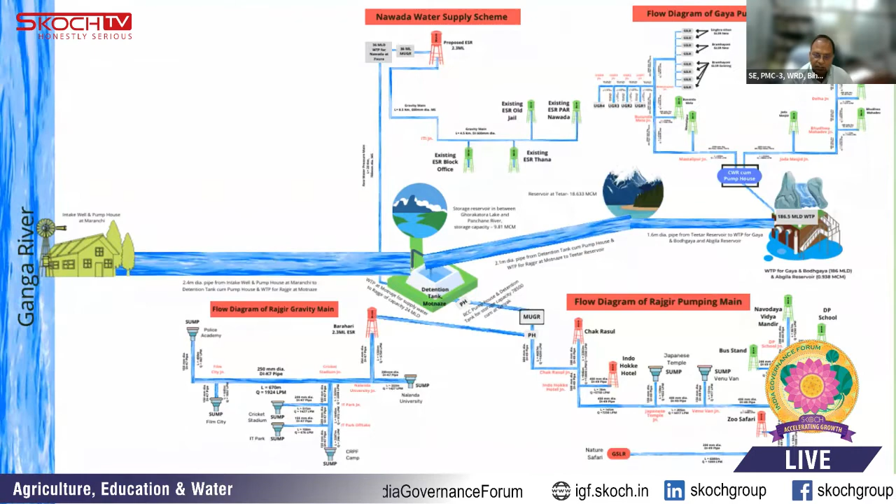This covers 151 kilometers from Hathidah to Gaya town. In this project, we are feeding drinking water to 3 water-scarce towns of Bihar: Rajgir, Nawada and Gaya.

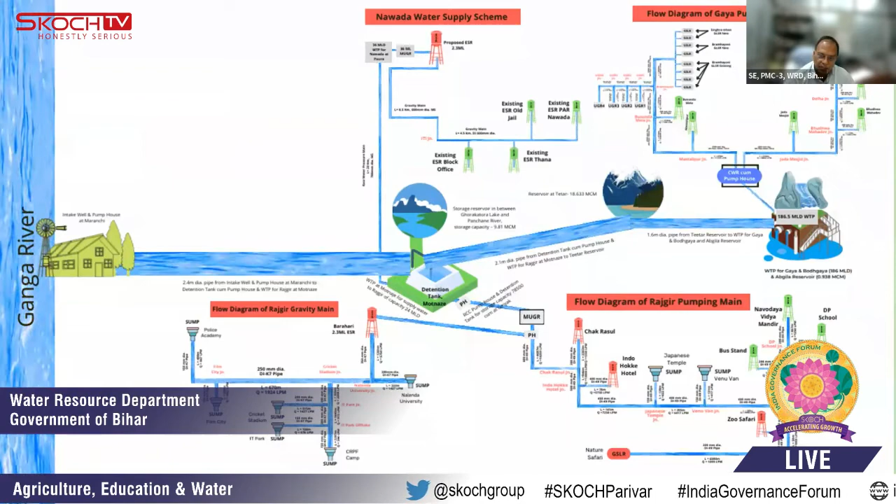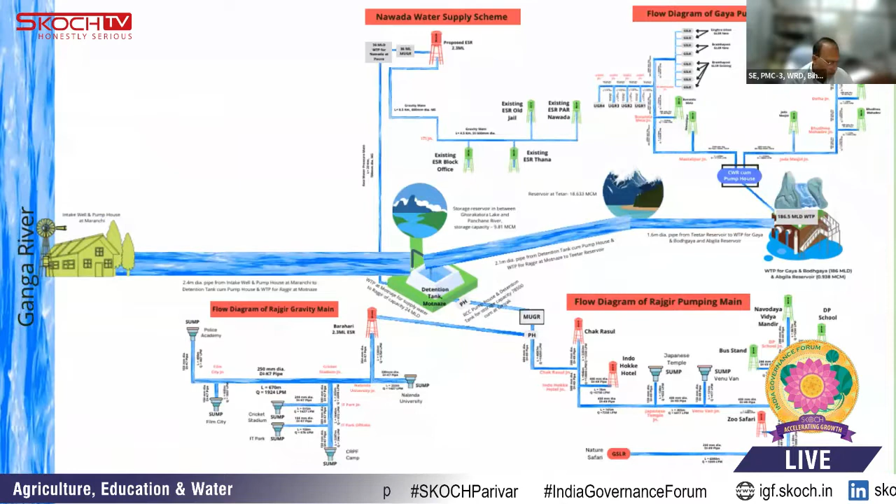In this project, we are lifting flood water during the monsoon season, for 4 months from July to October, lifting water around 80 meters from the Ganga up to Gaya. We are creating 2 huge reservoirs, one at Gaya and another at Rajgir, to store raw water for the remaining 8 months, and we will supply drinking water after purification throughout the whole year to around 9 lakh people in Rajgir, Gaya and Nawada.

As mentioned, this project has been considered in light of our Chief Minister's flagship program, Jal Jeevan Hariyali Mission. It was formulated because the groundwater table is lowering day by day in this area, causing a scarcity of drinking water.

In this project, we are utilizing flood water which was previously unutilized during monsoon and flowing into the Bay of Bengal. We extract this water during the monsoon period, store it in reservoirs for 8 months, and then supply it after purification.

Water demand has been calculated up to 2051, and in a stage-wise manner we will increase our supply according to the demand. Currently we are constructing this project for demand up to 2021, and gradually we will increase our capacity according to the demand.

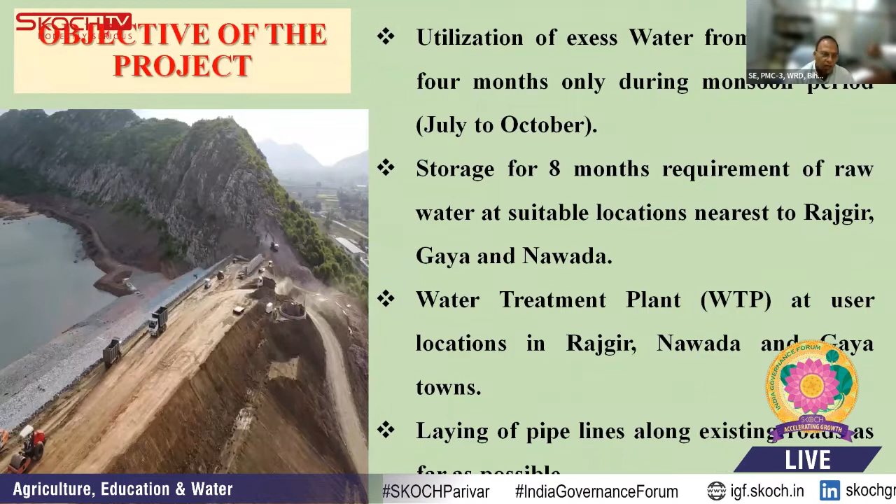The objective of this project is utilization of excess water from the Ganga for 4 months during the monsoon period, July to October, storing that water for 8 months in 3 reservoirs at Rajgir, Gaya and Nawada, and supplying it by treating raw water in water treatment plants. 3 water treatment plants have been constructed at Rajgir, Nawada and Gaya towns, and pipelines have been laid along existing roads.

Benefits of this project include employment creation for people in this area, and socio-economic benefit with enormous convenience of drinking water to urban and rural people and animals. Storage of water in the forest region of Rajgir Reservoir in Nalanda and Tetar Reservoir in Gaya will facilitate groundwater recharge, ultimately benefiting flora, fauna and the ecosystem.

As such, the project is techno-economically viable. Agriculture produce will increase due to improvement in groundwater level. Also, the wildlife sanctuary at Rajgir will be provided water from the proposed reservoir for various animals in the area and also water bodies inside the sanctuary.

Religious places such as Brahmkund, Saptadhara, etc. in Rajgir, which are hot springs, have become devoid of water as a fallout of alarming groundwater depletion. Declining rainfall, inadequate recharge of groundwater, and overutilization due to increased population appear to be the main reasons for the decline in discharge at the Rajgir hot spring.

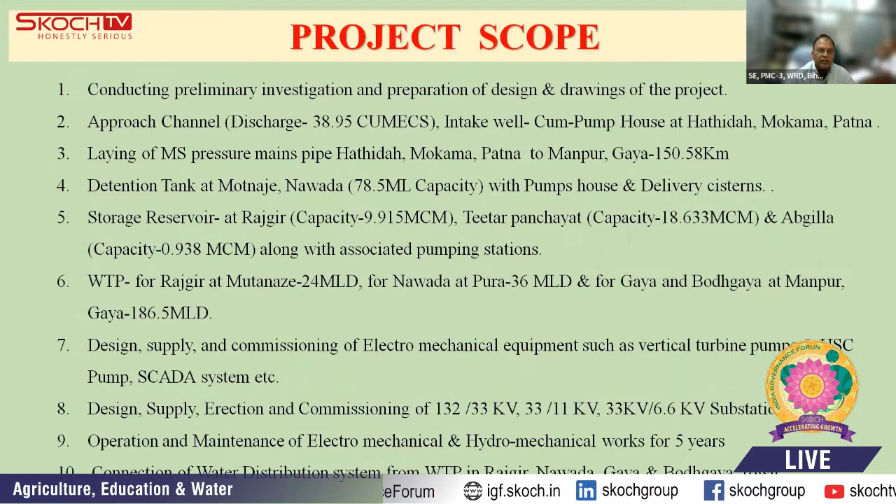These are a few pictures of the intake well at Hathidah Mokama, where we are extracting flood water from the Ganga.

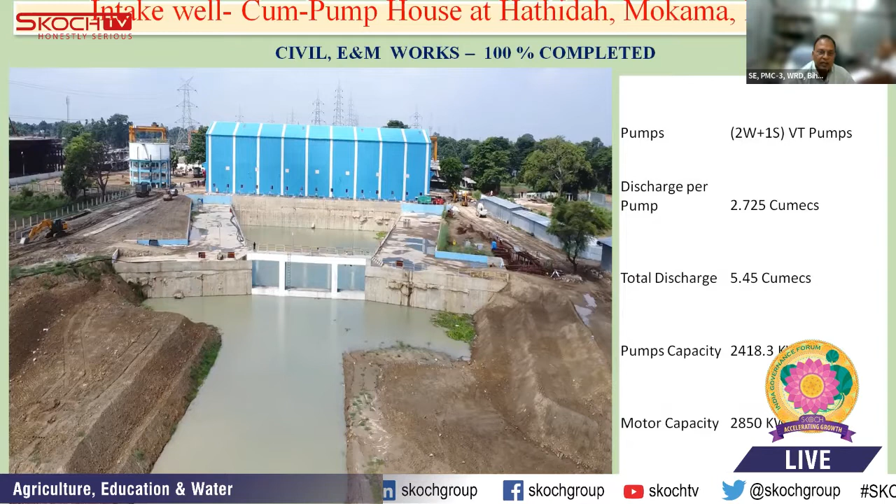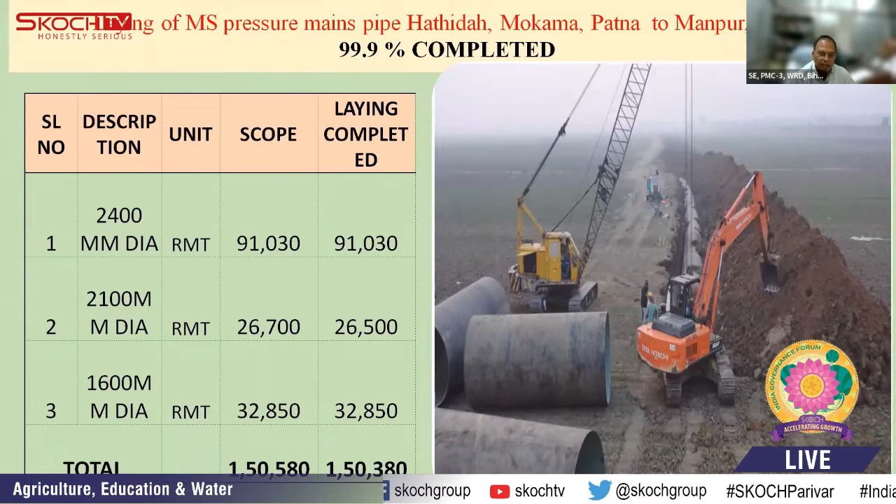These are pictures of the MS pipe being laid from Hathidah to Manpur, and this is the detention tank at Motnaje, Nawada.

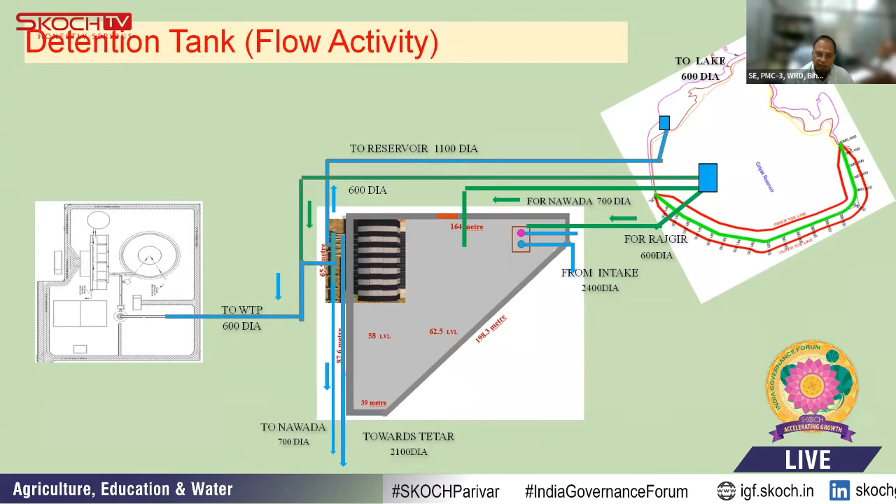Next, this is the highest level Tetar reservoir, which is situated in this pipeline at the highest altitude.

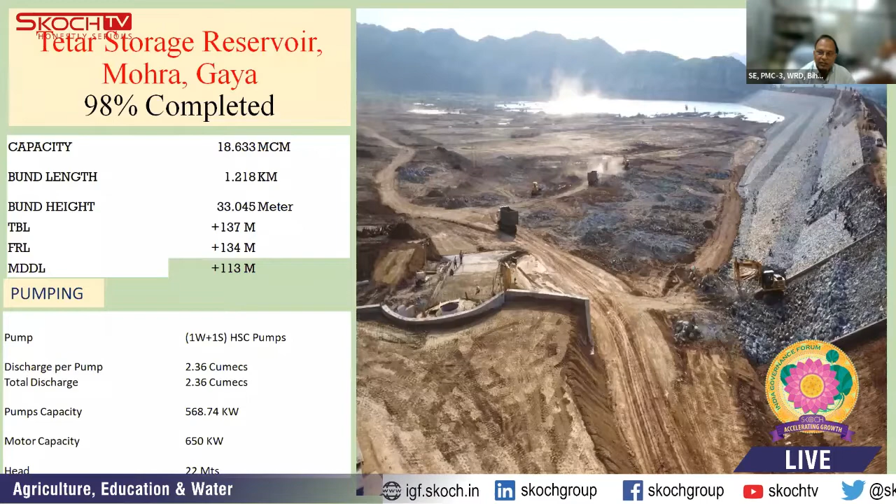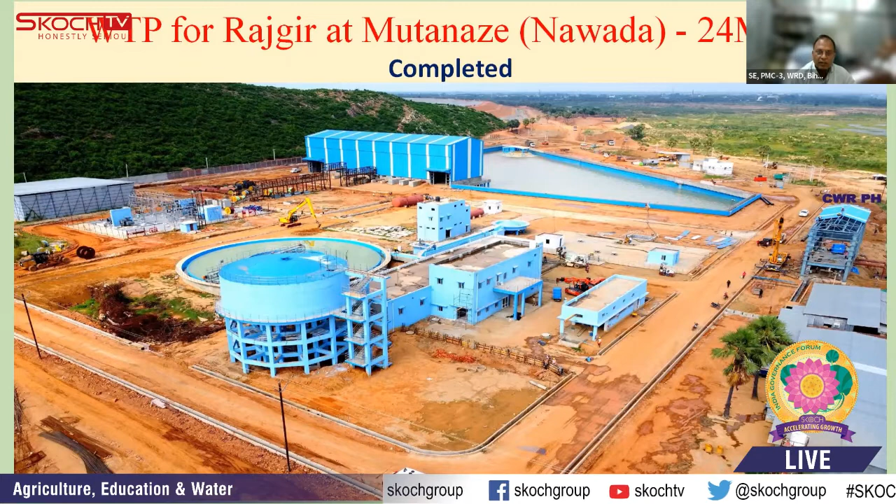Okay, next, this is the Tetar reservoir. Next, this is a water treatment plant at Nawada. Next, this is a water treatment plant at Gaya. And this is the Rajgir water supply schematic.

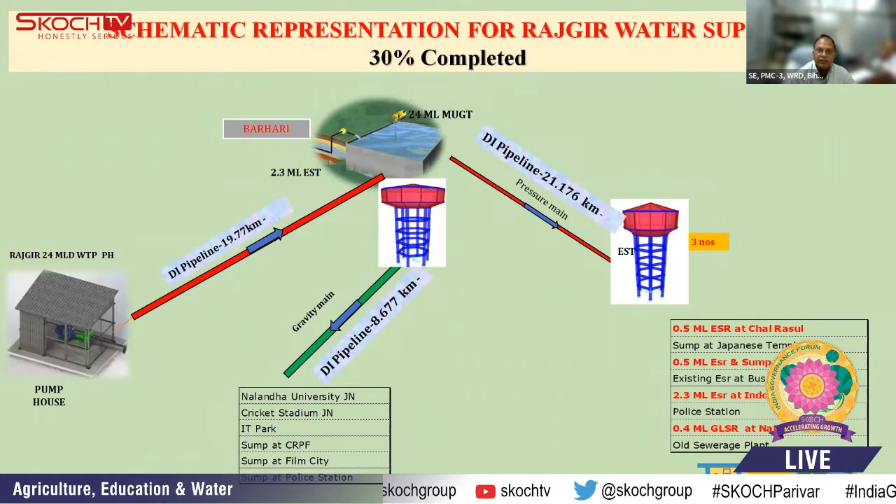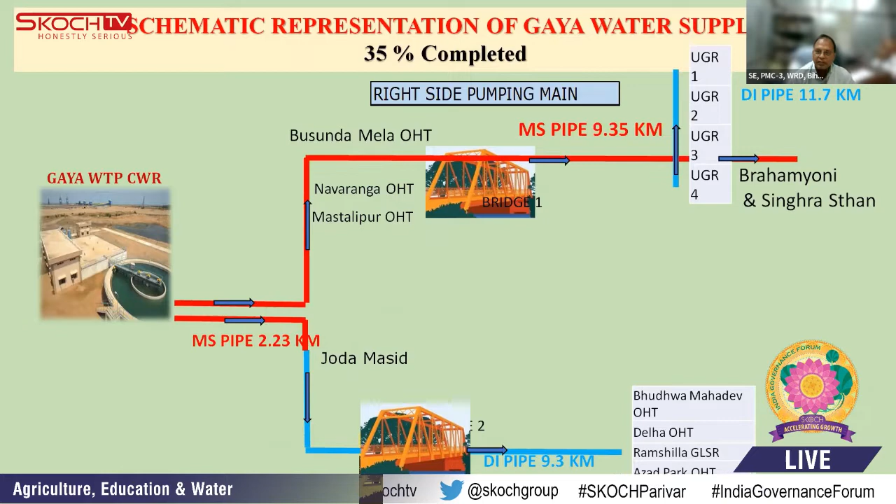Next, these are a few pictures of different components. Next, this is the Gaya water supply line diagram. Next, this is the Gaya WTP progress of work. Next, this is the Nawada town water supply.

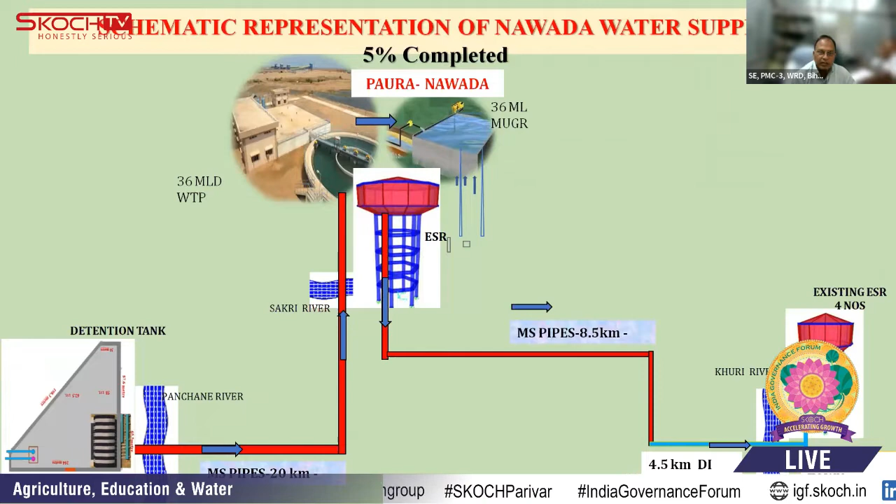Supply of Ganga Jal from the intake well to the detention tank is operable. Storage of Ganga Jal water in Rajgir reservoir is under progress. Operation of the Rajgir water treatment plant is also ready, and distribution of purified water to Rajgir town is under trial run.

Thank you. Jury members, Alok sir, very good sir, project. But normally in such a large project, there is always a time and cost overrun.

So, when was this project originally scheduled to complete, and what is the full completion date now expected? Sir, this project started 2 years back during the Corona period, but overcoming the challenges of Corona, the completion period is March 2023. However, we are ahead of the completion period and are likely to complete it by December, though our official project completion period is 2023.

Okay, so there is no time and cost overrun. No, sir. Okay, very good sir, excellent work. In fact, this will augment the water supply in your area.

But can you also think about connecting or supplying water to other areas besides these three major cities? Yes, sir, we had earlier formulated plans for a few more towns, but due to some constraints, since this type of project is being constructed in Bihar for the first time, we have limited it to these three towns only.

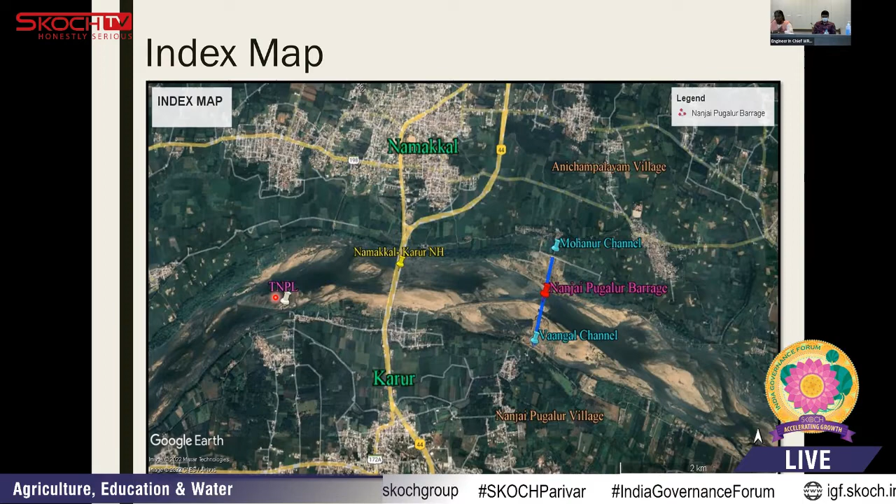And the fourth one is Tamil Nadu Newsprint and Papers Limited, one of India's leading paper mill companies, used to draw 14 to 16 mgd of surface water from Kaveri. During the severe drought in 2014, there was no water in the river, and there was acute shortage, and around 46,000 metric tons of paper and 22,500 metric tons of paper board was not able to be produced, and there was a huge revenue loss of 160 crores to the company.

This forms the necessity of constructing a barrage across river Kaveri in this location.

The benefits of the project. To overcome all these problems, the benefit of the Mohanur Canal is, at present, the Mohanur Canal is offtaking directly on the left side of Namakkal district, and the Mohanur head sluice is being constructed right at the junction point of the left bank where the barrage is located, so that the farmers can get the assured supply of water throughout, and the acreage benefited is 2,583 acres of Ayakat. In the same manner, Vaangal channel in Karur district will definitely be irrigated with an assured supply, and 1,458 acres in Karur district will be benefited out of this project.

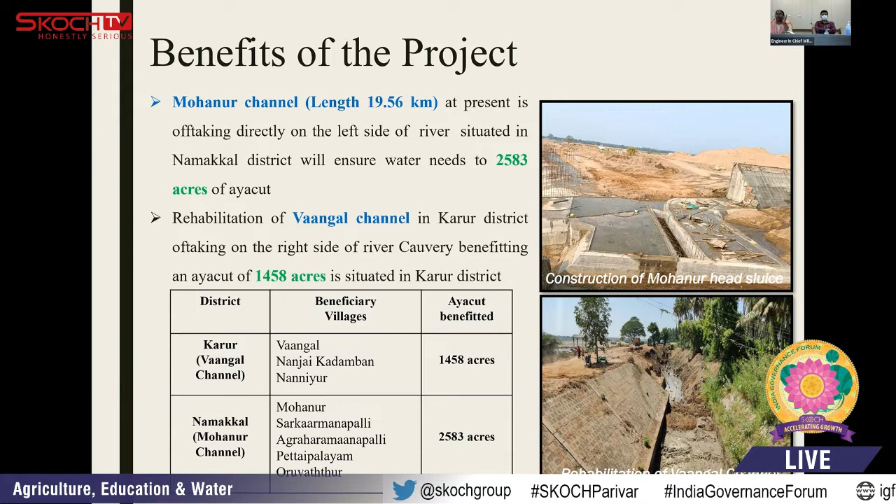And drinking water scheme pumping wells, which are located in the upstream of the barrage, where 0.8 TMC of water is stored, there are 6 pumping well schemes in Karur district and 9 in the Namakkal district that will be benefited out of this, and the total population which will be benefited with this project is 34,993 in Karur district, and in Namakkal district, 71,612 persons will be benefited.

Benefits for the industrial purposes. As said earlier, the backwater profile length of constructing a barrage to a height of 5 meters will be around 8 kilometers. The TNPL, that is Tamil Nadu Newsprint and Papers Limited, which is located about 3.5 kilometers in the upstream of the barrage, will get complete assured supply so that their water supply will not be devoid, and in the event of drought and even in the lean water season, there will be a minimum head of 3 meters, which will result in no revenue losses being incurred by that company.

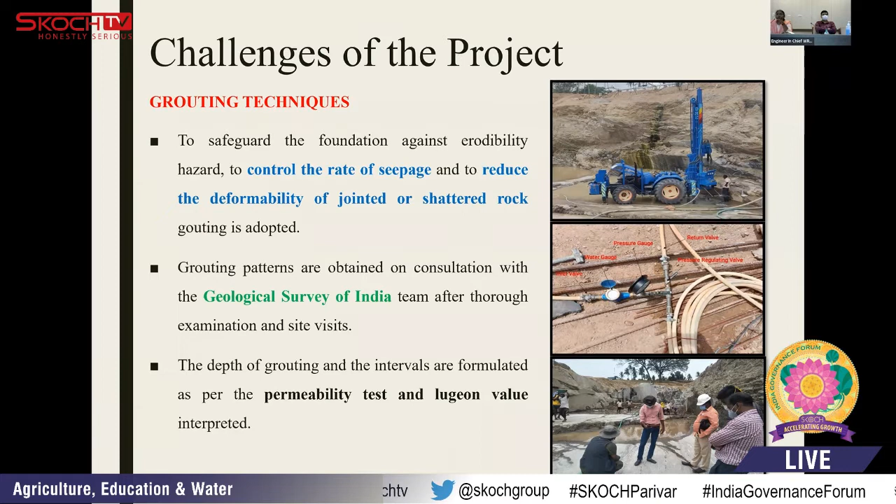Another challenge is the U-drain arrangement. In order to release the uplift pressure expected to be exerted at the base of the stilling basin, a drainage arrangement with required pipes below and above the foundation is provided. A water collecting system consisting of half round cc pipes and porous concrete is being filled in that, and at the upstream we have a non-return valve so that the water pressure gets released in the non-return valve area.

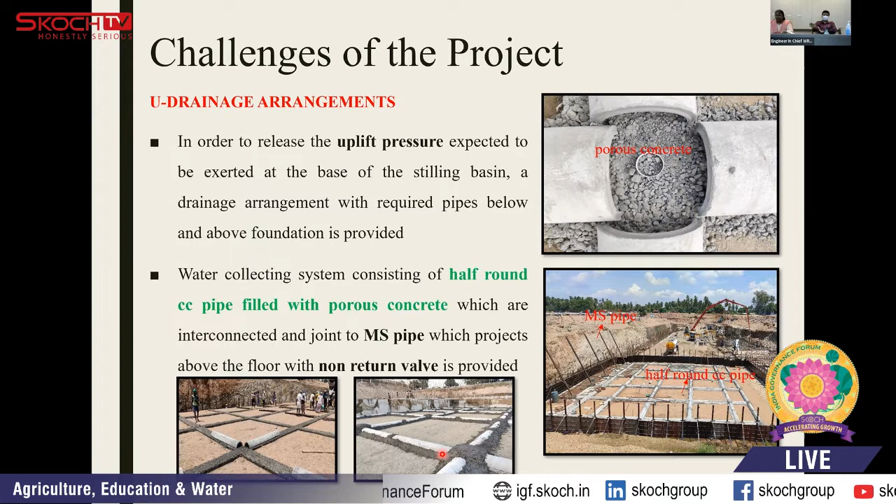The challenges of the project. Cauvery is a continuous flowing river all 365 days, even with a lean flow of at least 2,000 cusecs for drinking water purposes. In this river bed, an open foundation of around 42 meters floor length for a length of 1,056 meters makes a big issue because of the challenge of dewatering problems.

The dewatering problem is sorted out by various means such as the open dewatering method we follow. Then, if there is a sandy layer, it is better that we use the temporary well point dewatering method. In some places, there are various layers: the first layer will be sand, the other layer will be soft disintegrated rock, and the next layer would be the hard rock area. In certain cases, after encountering a sandy layer, we may sometimes get a layer of pebbles also. During that time, when the well point method or vacuum dewatering pressure method could not be done, we go in for multi-stage dewatering, and this is a huge process for an open foundation earthwork. This is the challenge faced in the project.

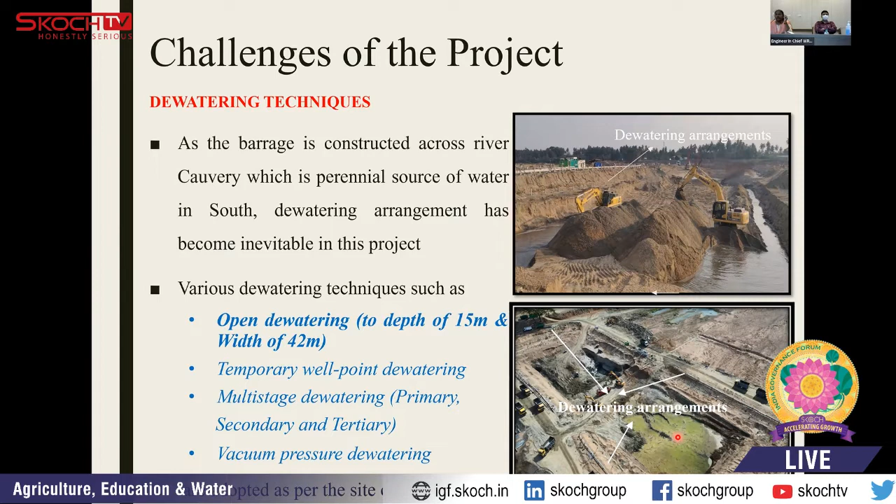Coming to the uniqueness of the project, since this project is located in a flat terrain, the slope of the river bed is 1 in 1,700.

Considering the aspects of the location of the barrage, the only available thing we can construct in this riverbed is a barrage to store the water and make it irrigable to other areas. This is one of the uniqueness of the barrage, and the lesson learned is that in flat terrains, only a barrage structure could be constructed, and water can be stored and utilized for multi-level purposes.

Another uniqueness of the project is the SCADA arrangement. After the regulating structure of Mettur, this is going to be the first structure with supervisory control and data acquisition, which is yet to be adopted. This stays much ahead of the conventional method of delivering water. By monitoring the water flow, the shortages and uncertainties of water to tail end users shall be monitored effectively.

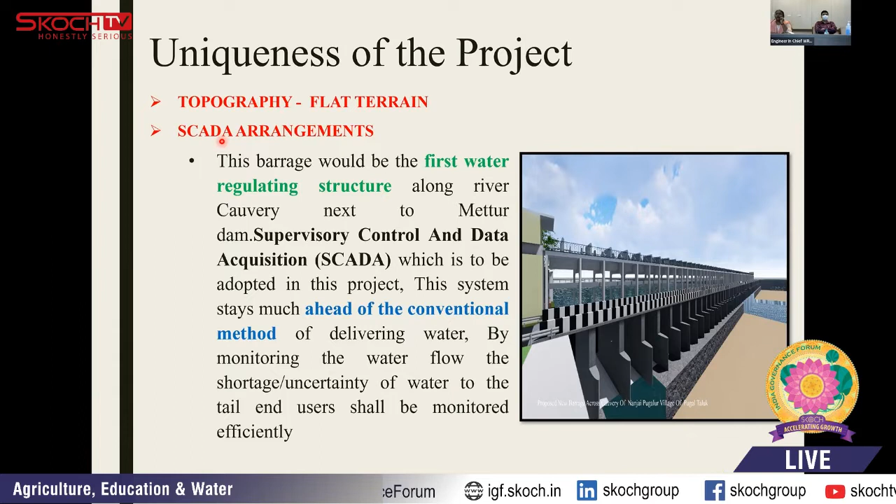Encompassing all of these things, agriculture is benefited around 4,041 acres of land getting irrigable, and the over-exploitation zone in the groundwater is recharged. For drinking water purposes, 1,06,605 people are getting benefited from Karur and Namakkal districts, and as industrial usage, 160 crores per year worth of water will be given to the Tamil Nadu Newsprint and Papers Limited.

That's all, thank you very much. This is the importance of my barrage work, and it comprises a wholesome work. As we have studied in our earlier days, water is used for agriculture, domestic, industrial, and drinking. My project encompasses all of these things, and that is the uniqueness of the project.

Constructing a barrage across the river Cauvery in a flat terrain is the lesson learned from this barrage. Thank you, one and all. Thank you, jury members.

Thank you, ma'am. This is a very multi-purpose project. You have given so much benefit to the entire region. Excellent work, thank you very much. Thank you very much, sir. Thanks, ma'am, good project, no specific question to ask.

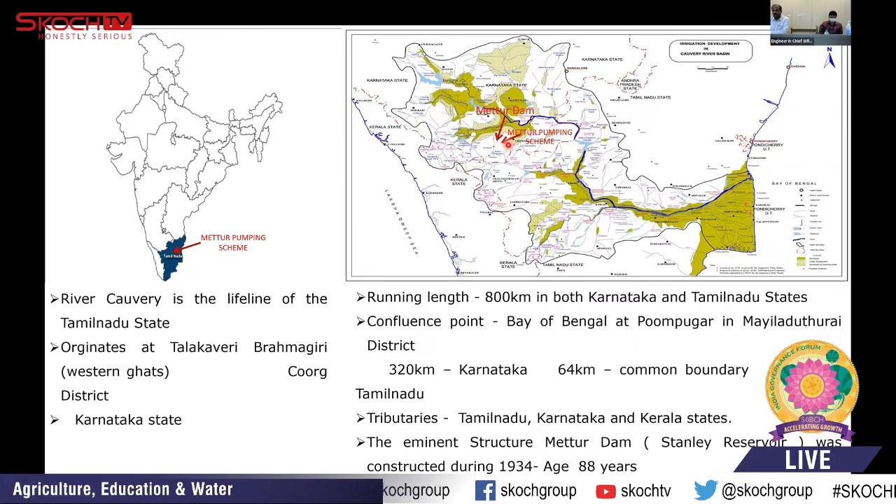The Mettur reservoir is constructed across the river Cauvery in Salem district of Tamil Nadu. To fulfill the need of agriculture and to divert the excess floodwater from the Mettur reservoir, the scheme is proposed to construct a main pumping station on the left flank of the reservoir, located in the Thippampatti village of Mettur Taluk. Need and necessity of the scheme.

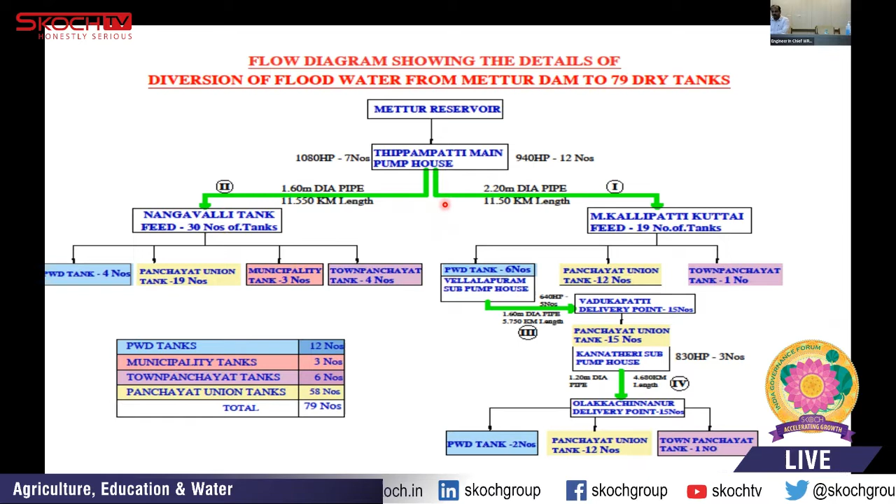In this scheme, 3 pumping stations have been constructed for lifting water at various levels. The main pumping station is constructed at Thippampatti village of Mettur to lift water to a height of 139 meters, and sub-pumping stations are constructed at Vellalapuram and Kannatheri, at about 60 and 40 meter heights respectively.

The land acquisition work has been completed for about 74.58 hectares out of 109 hectares, where land acquisition is in progress.

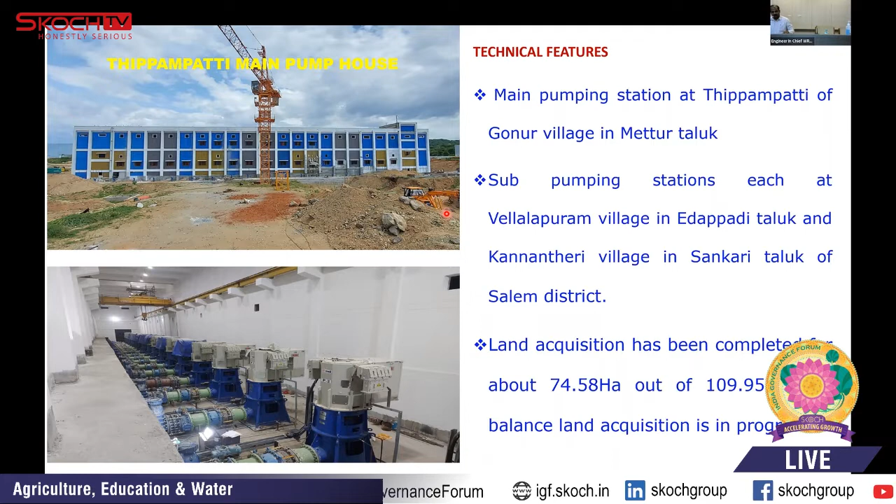By implementing the scheme, the Sarabanga Basin would be sustainable, improving the welfare of the farmers. We are achieving the project credits by way of improving irrigation facilities, increasing food production, creating more employment opportunities, and thereby improving the socio-economic status of the people. Groundwater recharge can achieve 4 taluks.

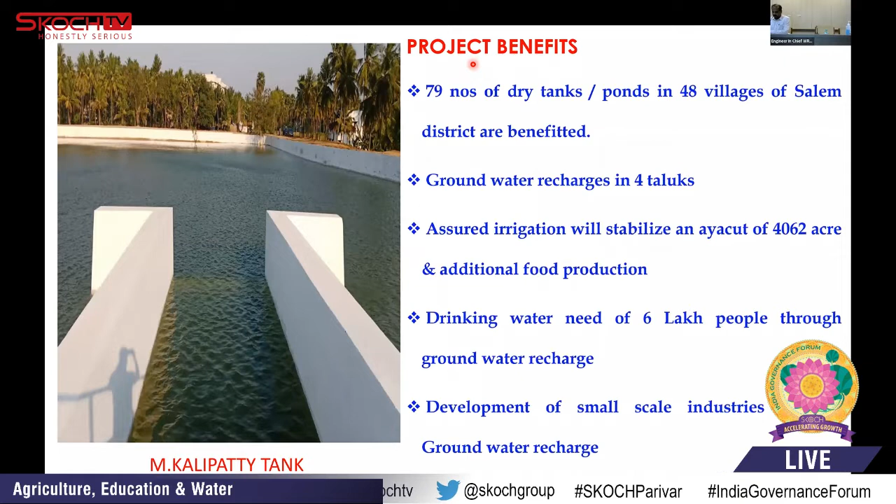By way of introducing cutting edge technology, it is a new technique, sir, to design the pumps and pipes.

Sarabanga subbasin is not a flat terrain, and it has a number of ridges. For that, we have to fix the alignment of the canal in the recharge zone to improve the subsoil water table in the command area, using the soil zonation map and contour map with the help of experts from technical institutions.

It was very difficult to connect the tanks at higher elevation with the existing canal. For that, we introduced a sub-pumping station to lift water to the higher altitude tanks.

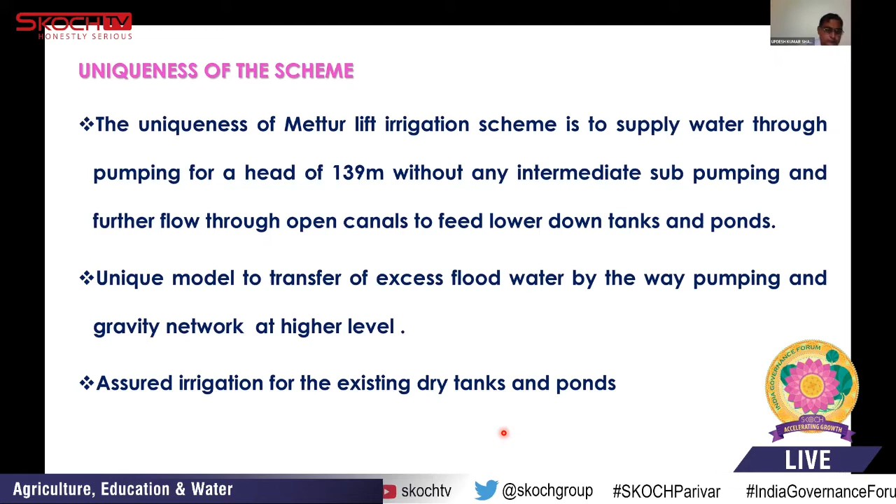Outcome of the scheme: this project becomes a model for transfer of surplus water to existing dry tanks for better availability and stabilization. It is a unique model to transfer excess flood water between the subbasins by a combination of pumping and gravity methods. The groundwater table has increased by about 30 centimeters in the over-exploited area.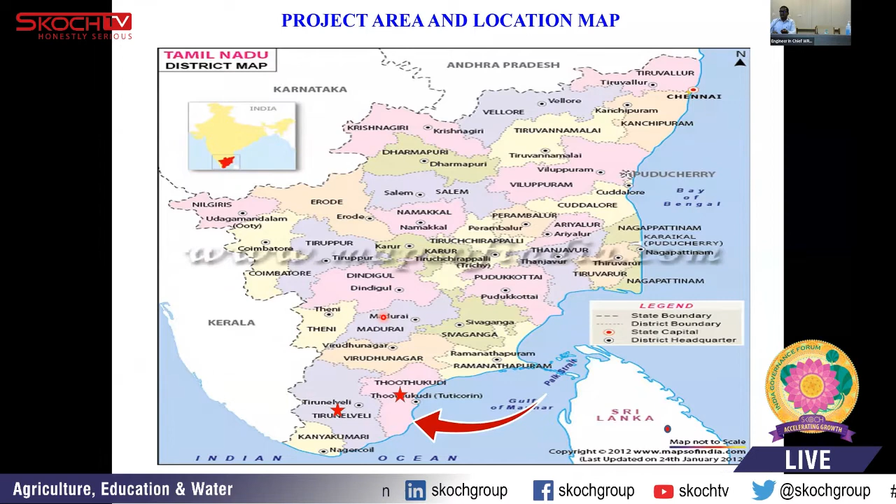The irrigation industry is also getting affected, and food security and water security are a question mark here. For that, our Tamil Nadu government has formulated an interlinking project within the state. Thamiraparani is the only perennial river that originates and ends in Tamil Nadu.

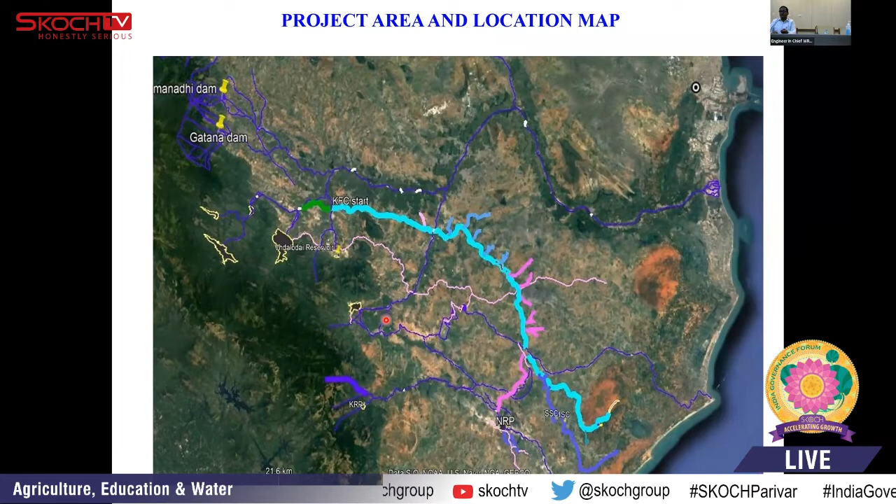So we have some surplus water from Thamiraparani. We put up a diversion structure across Thamiraparani, diverting water to the tune of 3,200 cusecs for hardly 10 to 15 days in the year. Without affecting the irrigation interest of the existing Thamiraparani basin, we divert the surplus water to 3 river systems, linking one after another. About 23,000 hectares of irrigated land is being stabilized, besides bringing water to livestock and other areas.

This is basically to stabilize irrigation in 23,000 hectares and also add some new high-tech irrigation to the tune of a thousand hectares as well. We are filling 252 tanks and ponds located in this area through groundwater recharge. About 50 villages and 50,000 farmers are getting benefited. It's basically a flood carrier canal, and the total length of the canal is about 75 kilometers.

So we have created some infrastructure as well - diversion weirs, two reservoirs, and CD works. We also crossed the Tirunelveli to Kanyakumari railway bridge, and there is the NH44 national highway to Kanyakumari that we crossed. We have created a lot of cross drainage works for this project.

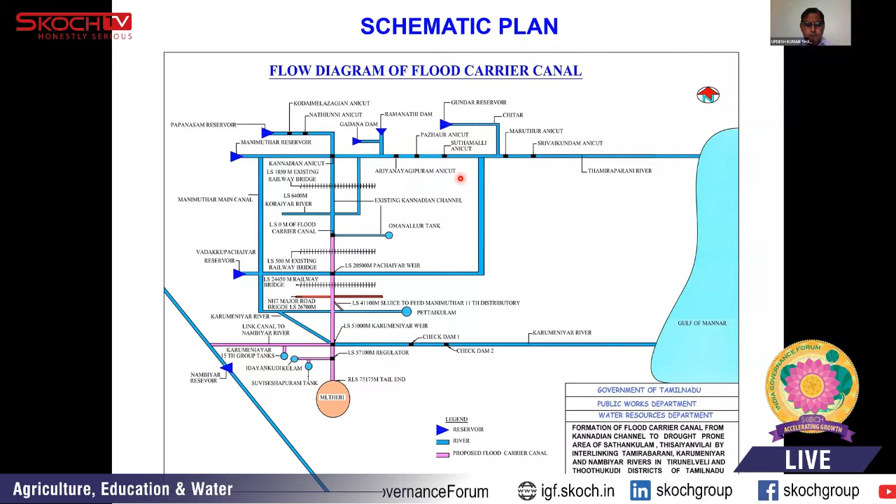So this is a schematic diagram. We are diverting the surplus water from Thamiraparani and routing it to Pachaiyar, Karumeniyar, and Nambiyar. This is the area.

We have a number of challenges during construction. This project was commissioned in the year 2009, and land acquisition is a major problem here. We need 1,227 hectares of land to be cleared for the canal and other hydraulic structures, out of which 1,000 hectares is from private landowners. Land acquisition is a very complicated and hectic issue.

We kept pursuing land acquisition with district administration, and many private landowners went to court, leading to a number of litigations. We sorted them out one by one, and finally got the lands.

Right now the project has stages 1, 2, 3, and 4. Stages 1, 2, and 3 have already been completed, and in stage 4 almost 50% of the work is done, with remaining works in progress. Hopefully this project will be completed by March 2023.

We started this project with an initial cost of 369 crores, but due to cost escalation, land acquisition costs, and additional items and components, the final investment comes to around 933 crores as of today.

We have excavated 5 million cubic meters of soil for the open canal, which has a carrying capacity of 3,200 cusecs and runs about 75 kilometers. Disposing of all this excavated hard rock, soft rock, and gravel is a big challenge, for which we initiated a disposal method along with the district administration.

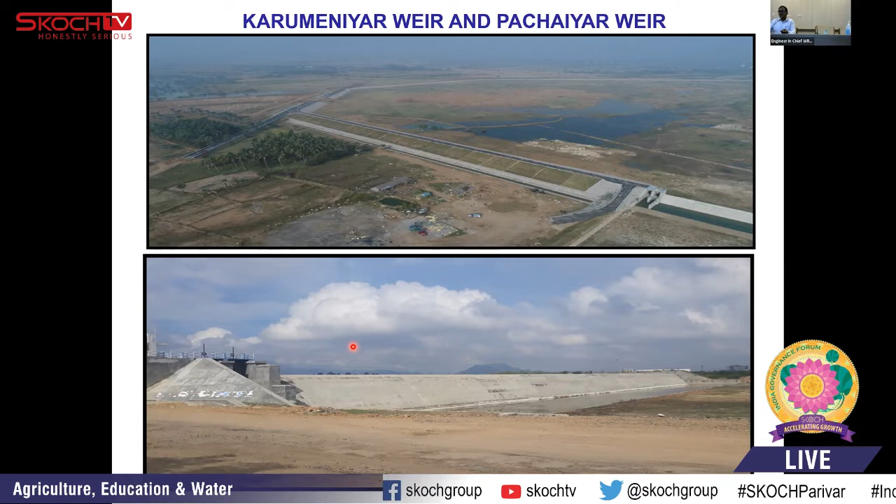Probably within 6 months we will be able to complete the entire project, and probably the floodwaters of 2023 from Thamiraparani will be lifted through this canal and put to benefit of all these brownfield areas. So this is the first project, as I already said. And the second one, we already started the Cauvery-Gundar link, another interlinked project in Tamil Nadu.

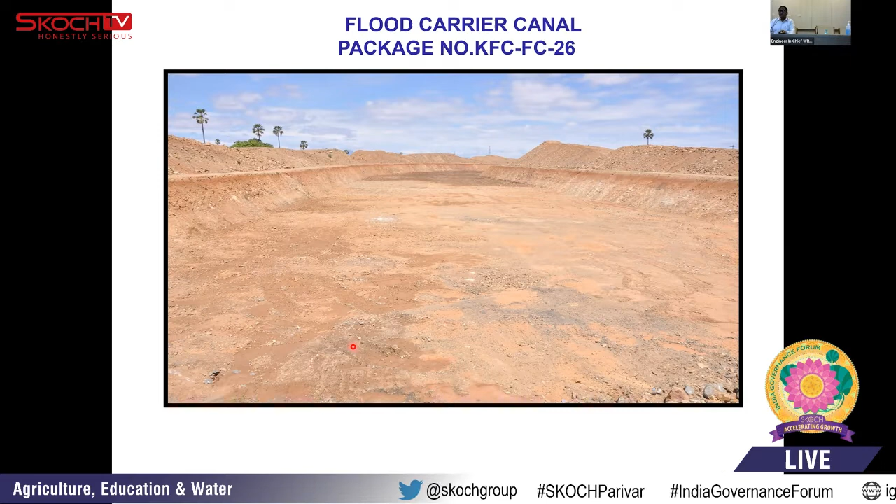So this is the open canal. It is all unlined channel. Carrying capacity is 3,200 cusecs. This is the tail end of the project, where this is teri sand. We call it almost like a desert, something like Rajasthan.

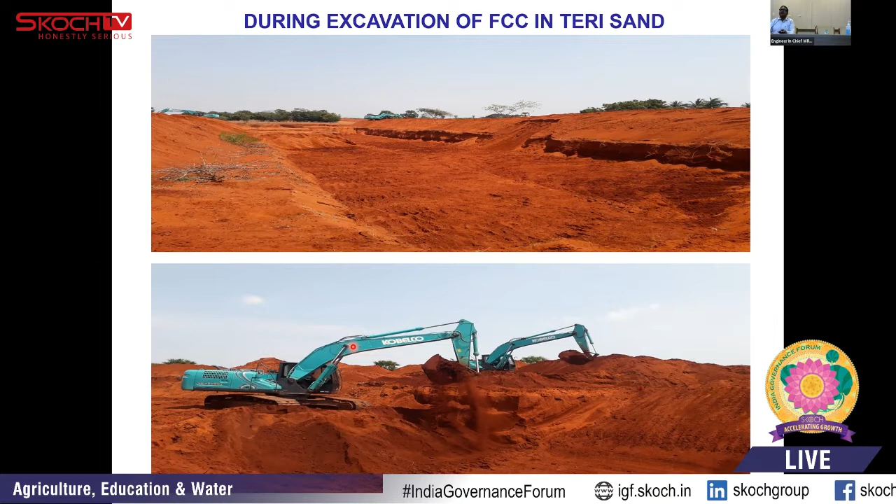So here the challenge is how to stabilize the slope of the canal. We are looking at it, and IIT Madras and other institutions, our knowledge partners, are working on that part. We are making some proposals for stabilizing the teri sand canals for 6 kilometers. So that is going on there.

So this is the canal with precarious sections, teri sand in the southern part. It is a specific area, not everywhere. Probably 6 to 7 kilometers we dealt with this kind of sand. Many external agencies are working on it, and we're figuring out how to go about it.

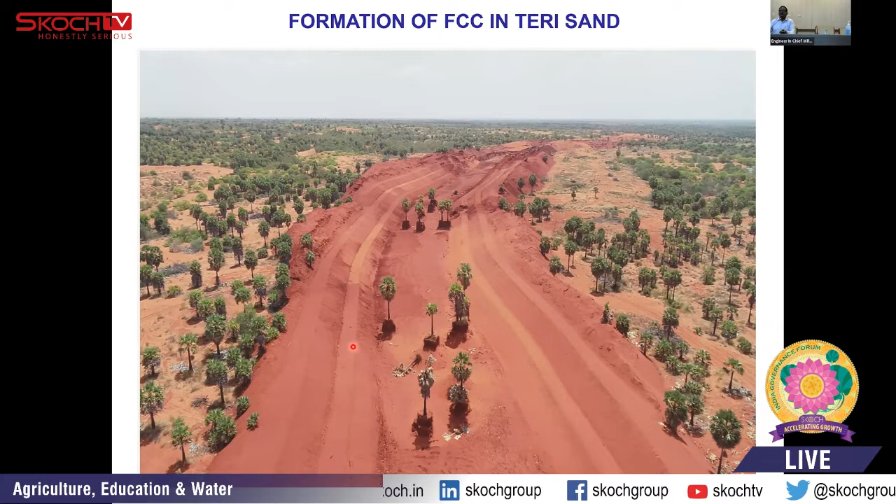And these are some structures, a few structures created for this interlinking project.

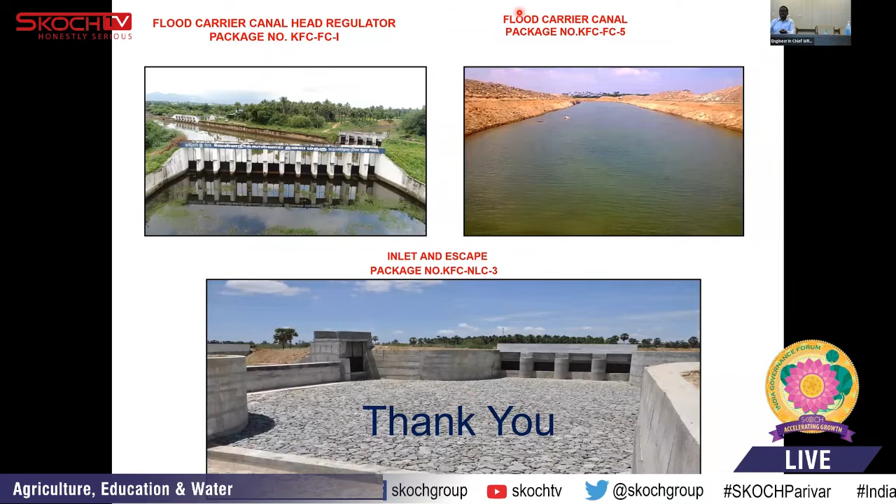Very good project, sir. When you are dealing with the sandy soil, how do you take care of it? What treatment is done for this irrigation project?

Well sir, actually it is really a tough time for us to excavate canals and to protect the canals. Studies are going on, and we invited some private consultants from Germany as well. Actually, we made it a 2:1 slope right now, and still it is unstable, totally unstable. So we need to allow percolation to the canal. That is number one. So without affecting the percolation, how to protect the canal is a challenging problem. We are working on it.

Actually, we proposed one pilot project for at least 1 kilometer to start with, and based on the success story, we want to upscale it for the entire length of 6 kilometers. So it is a really challenging problem. We are looking at it.